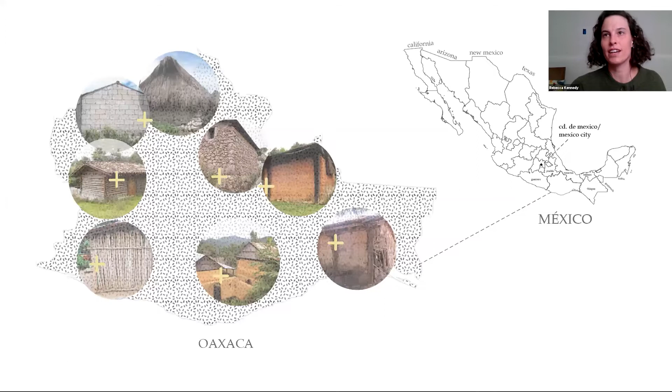So when I'm thinking about the ways that these techniques have impact on the broader land use patterns, these are, by the way, all techniques that I study in very rural areas. Urban areas have primarily shifted to fully concrete, but some of these examples are still extant in small towns. So one of the anecdotes that always comes to mind is the story of zacate, which is a type of grass that used to be used for thatching roofs. This photograph was taken in the town of Zacatepec.

The first part of that town's name is zacate, that grass, because all of the roofs in the town used to be made of zacate, and it used to grow in abundance in the public lands surrounding that town. And this photograph was taken, these two people kindly agreed to take me out to where the zacate fields used to be located and where people harvested the grass from.

And today there's only some scattered plants, very poor quality. They wouldn't be good enough for thatching with. And these people also, we knew generally where it was, but there's sort of a loss of knowledge of where the plant was even, where it's located, where those fields used to be.

So this shift in abundance of the plant and of local knowledge has to do with widespread adoption of concrete construction and corrugated metal roofing, which of course has been sort of marketed as this indestructible building material. But roofs like the one on the left that were thatched, as I mentioned, used to be literally the only roofing technique in the town.

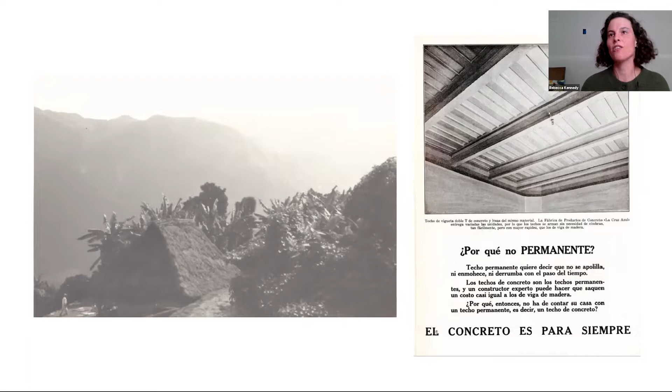And using that material went along with a certain set of practices of land stewardship, such as burning the zacate fields every year, and also just the act of cutting the grass to use for thatch. The cutting and the burning both stimulated regrowth of those zacate plants. So as building techniques have shifted to concrete, the plant itself has ceased to reproduce.

So I just find this story very indicative of trends that are happening in towns all over Oaxaca, all over Mexico, and all over the globe, where two interesting things. So the younger generation really has no knowledge of where those plants were located, how to harvest them, when they might be ready to harvest, let alone how to build a building out of them.

And secondly, even if they wanted to, the materials, I mean, mineral resources are a different story, but biological, if we're talking about plants, there isn't enough abundance to really build with. Two architects tried to build a house in Zacatepec 2 years ago with a zacate roof, and there literally wasn't enough quality grass in the whole town to thatch one roof with.

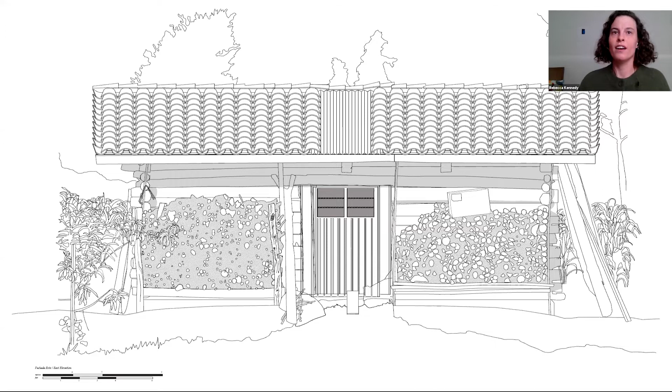So I'm going to take you guys through the full process of material harvest and refinement for log cabins, which are really prevalent in northwestern Oaxaca in a really heavily forested region where, aside from adobe, all of the building techniques are very reliant on pine products.

So when people are deciding what technique to build with and doing the calculus of what for us might be saving to build a house, saving money, the cost of a traditional home depended a lot on the distance that you had to travel to gather a material and the means of transport.

For instance, pine needles, which people also used for thatch in this area, are a relatively cheap material because you can carry them on your back. You can enlist your family over a period of days or months to help you harvest and carry it.

A material like logs is quite expensive because you need help processing the logs, which involves trade of labor with someone in your town, a friend or family member, which you have to pay back with help on future projects. All of these techniques were outside of a wage economy and based on cooperative systems of labor.

With logs, it also entails use of oxen to drag the logs because they're very heavy. To have oxen, you're automatically sort of wealthy because you can afford to have them, or if you're trading with someone else for use of their oxen, that's again increasing the cost. So these decisions involving the landscape were very integral to deciding which materials to use and what to build your house out of.

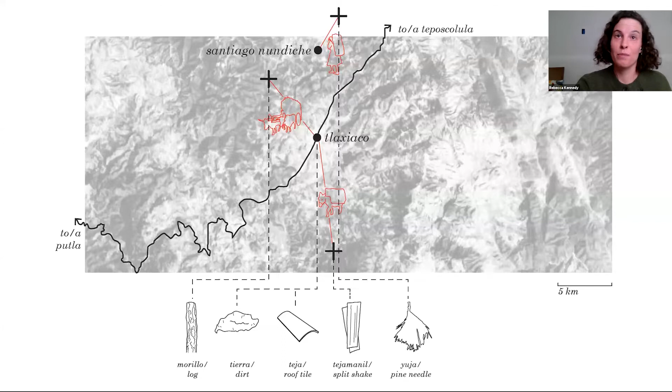So supposing someone decides to build with logs, you would go into the forest typically in pairs of two and work with a partner to cut down the tree and process it, peeling the bark off, working alongside someone else. You end up with an octagonal log, as symmetrical as possible, very measured about making all faces even so it will sit nicely in the wall once you're using it for construction.

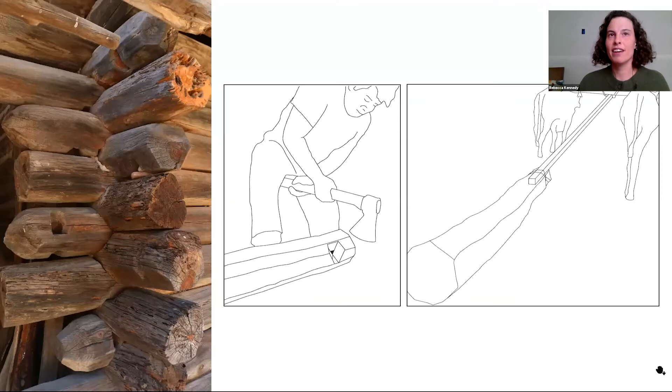Then they leave it to sit in the forest for a minimum of two weeks to dry out so it's lighter to carry. At that point, they cut notches or holes in the end of the log so oxen can pull it. This is where trade comes in handy, because you might enlist someone else and their oxen so you have two pairs carrying as much lumber as possible back, so the whole job gets done quickly.

On the left, a lot of houses still have holes left over from dragging the logs back to the building site from the forest.

Just really quickly, in the same region, split shakes were also very prominent roofing materials, using the exact same pine products. This entails a different set of knowledge that varies based on what finished product you're looking for. With split shakes, you need to cut the tree open, make a little incision to check the grain pattern, and make sure it's straight enough so it will split evenly into nice shakes.

These guys know which trees they've checked before, and which trees might be coming of age for kind of old growth lumber forests, like the back of their hand.

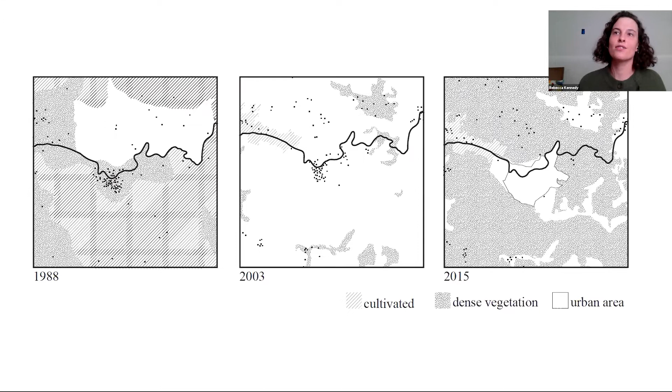As people use the landscape around their town less for agricultural cultivation and less for cultivation of construction materials, the town landscape is in some ways becoming more neglected, and as a result growing back, which of course has some ecological benefits potentially, but it's also interesting because it implies a lack of stewardship.

So these changes in the physical composition of the landscape also are related to our conceptions of the outdoors and nature, what we might call nature.

His parents, coming of age in the generation where the shift to the wage economy was happening—I'm generalizing here—have a more nostalgic view of nature. And then the youngest generation today just has a much more urban conception of nature as a place for recreation.

So bringing this back to construction materials, Oaxaca and many parts of the globe are witnessing this dramatic transition in construction technology that's almost completely taken place. It's hard to know at times whether importing materials and potentially having regrowth of forests is a good thing, or whether it's better to have a really innate understanding of resources and how they're being used. These are complicated decisions, but it's important to analyze the ways we often think of materials and construction technique as a direct relationship.

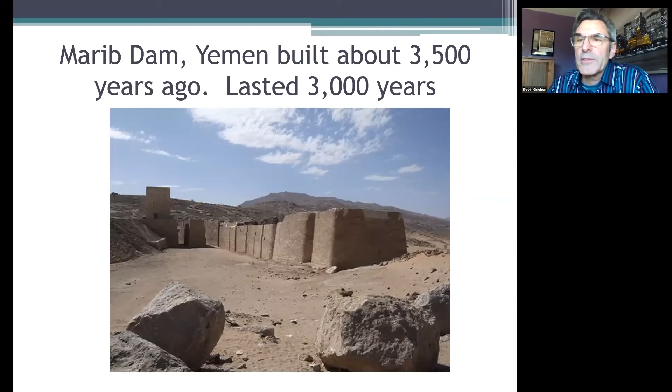Also related to this, in 1586 Simon Stevin, and Pascal in 1663, solved the hydrostatic paradox demonstrated by Pascal with the exploding barrel experiment. If you have not Googled this, there's a great YouTube video of the exploding barrel experiment. That is, the pressure at a certain level in a fluid is proportional to the vertical distance to the surface, not the volume above it.

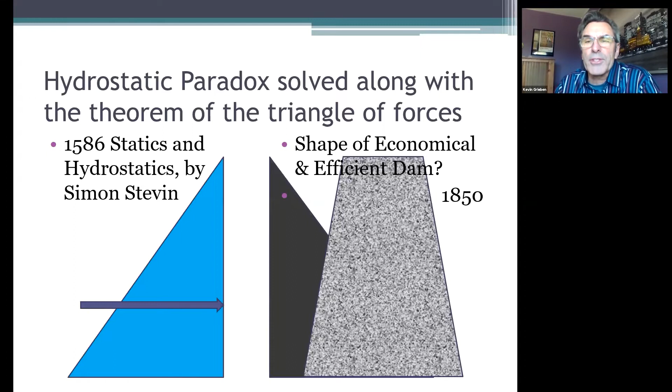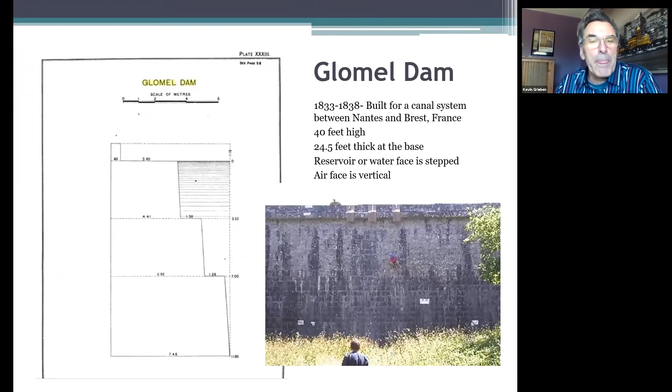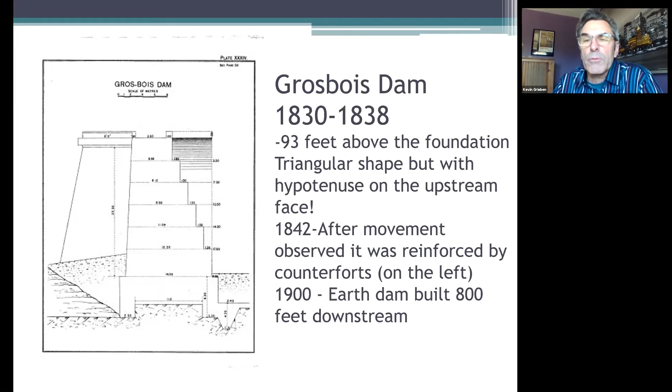Another similar dam is the Grosbois Dam in eastern France, and it was initially built like the Glomel Dam with a vertical downstream face. It is mentioned in the ASCE book on instrumentation for dams that the crest was surveyed to monitor its displacement. This monitoring during successive infilling and emptying found the dam to be deforming elastically. With movement mentioned beyond what was expected, counterforts or braces were constructed against the downstream face.

A gravity dam, which we hear a lot about, is constructed of concrete or masonry and is designed to hold water by using the weight of the material to resist the horizontal force of water. The previous two examples were poor examples of a gravity dam. A design for a gravity dam is finally resolved into an economical design in about the mid-1800s.

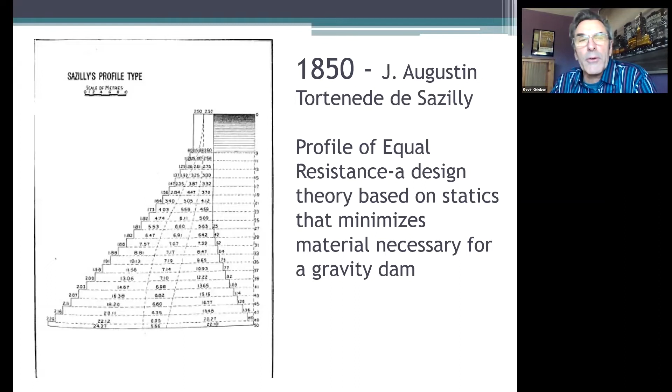An early design is by the Frenchman Sazilly. He believes that an economical design for dams would eliminate tension in these masonry walls. To me, it's interesting that they were thought of as masonry walls and not really as a dam. But no uplift pressure was acting on the base of the dam, and notice that with his assumptions, the base is basically, or maybe slightly less than, the height of the dam.

So 8 years after he comes up with this theory, a very risky engineer, I would think, implements that theory and designs and constructs the Furens Dam in France. And so he builds the highest dam in the world at the time with this new theory. And that just seems a little strange to me as a way to test out a new theory.

The 180-foot high dam was completed in 1866 using 52,000 cubic yards of masonry. As the method was new, the dam was slightly arched across the gorge for additional strength. And again, in Wegmann's first edition in 1888, it is said to be the first masonry dam, quote, built according to scientific principles. And again, the dam is still in use today for flood control.

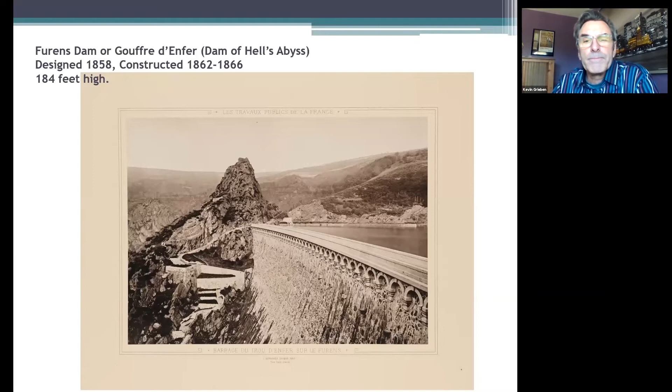20 years after Sazilly's profile of equal resistance, the famous Scot William Rankine develops 3 rules to ensure the stability of dams. The second rule, again, deals with tension, and he says it should be eliminated in dams by keeping the resultant in the middle third of the base, or the kern. And again, uplift pressure is missing, but directly impacts his rule number 3.

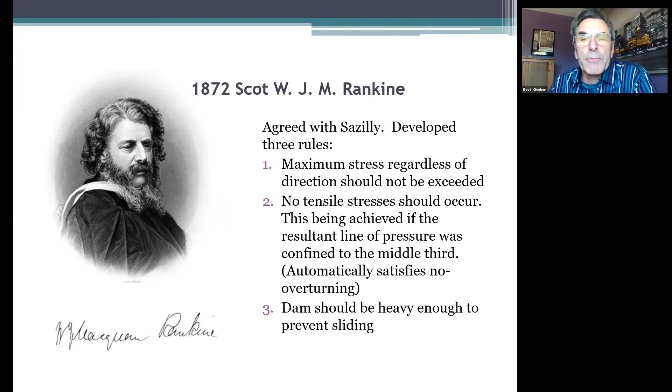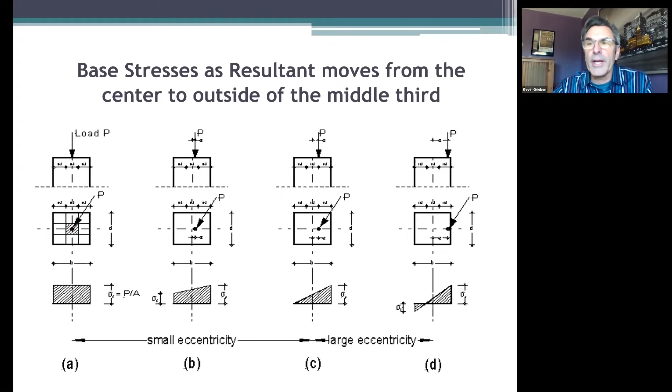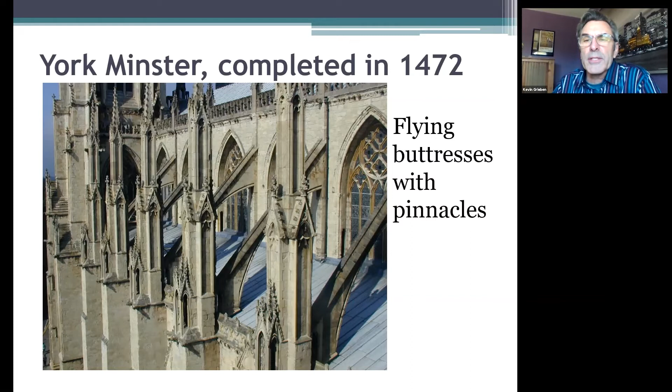Because to me, it shows that these masons in 1472 knew that these pinnacles reduced or eliminated the outward thrust coming from the flying buttresses and reduced the tension in the piers in these cathedrals. As we will see, this realization to reduce or eliminate tension is not codified in dams for another 400 years.

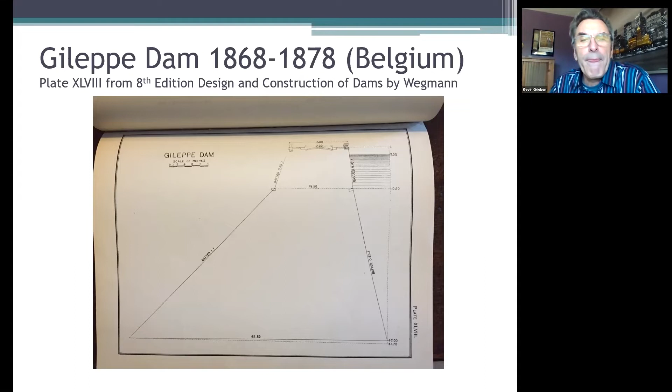Upon first filling and for about 4 years, the leakage rate through the masonry was about 220 gallons per minute, and some thought that leakage through the masonry was good. Also, what was very interesting is this masonry dam took 6 years to build with about 325,000 cubic yards of masonry. The work per man amounted to about 3 cubic yards a day, and in today's construction, I don't know if that would cut it.

Similar to the pinnacles on top of the flying buttresses, were the engineers thinking to include this 300-ton, 44-foot tall lion sculpture in the stability and stresses in the dam? I don't know. And if you think about it, this 300-ton statue is very similar to a post-tension anchor that we install through dams to increase their stability today.

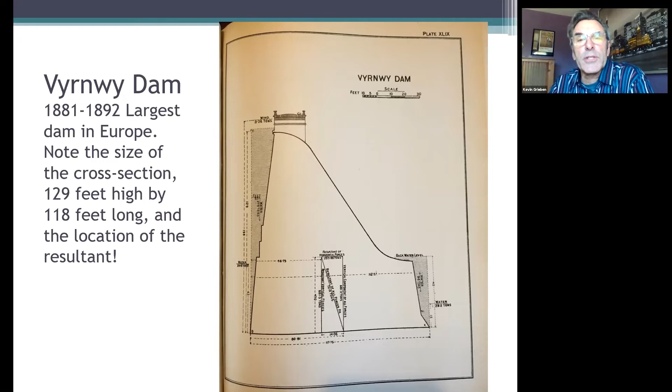So now we move to Great Britain, and there is a Welsh dam, Vyrnwy. This dam is of Cyclopean rubble, and it's very similar to the massive Gileppe Dam 15 years earlier, and is the first large storage reservoir to supply water to Liverpool. Its base is about 90% of the height. And notice the static computation for locating the resultant, and that it is located within the middle third.

However, this dam has a new twist. It has drains. And I've read before that the drains were installed at the insistence of the contractor that was involved with the design. So to me, it's an interesting coupling of the contractor for construction and the designer.

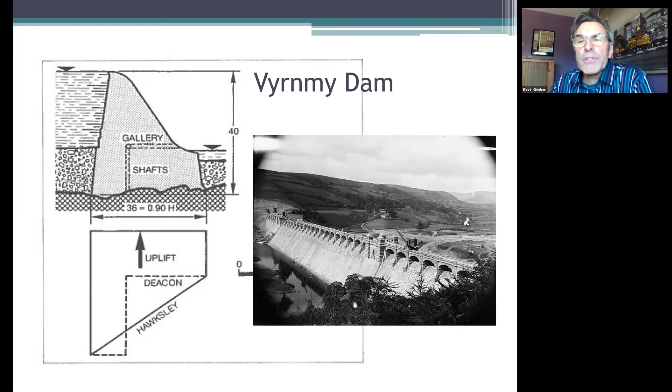This shows the resulting cross-section with the design assumptions and drainage tunnel due to concerns of leakage at the base and through the masonry. The uplift shown by the solid line in the diagram below the dam's cross-section was full headwater to tailwater, assumed by the engineer Hawksley. The dashed line shows the assumed uplift by Deacon, who I believe was also a designer, but also a contractor, as the line of drains drops it to the tailwater. These uplift assumptions are close to what is typically assumed for current dam safety assessments.

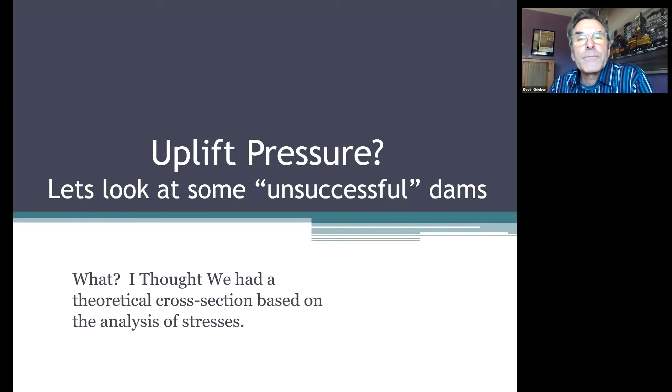So we have seen that uplift pressure was sometimes considered in the design of dams, but was not included in the design standard, the profile of equal resistance. So we remember that cross-section of the Vyrnwy Dam with its base 90% of the height. The Bouzey Dam is less massive with a base of about 60% of its height. And the Bouzey Dam failed in 1895, killing 85 people.

And interestingly enough, a forensic investigation followed. It concluded the need for a solid foundation, no tensile stresses, and to include uplift's role in the design.

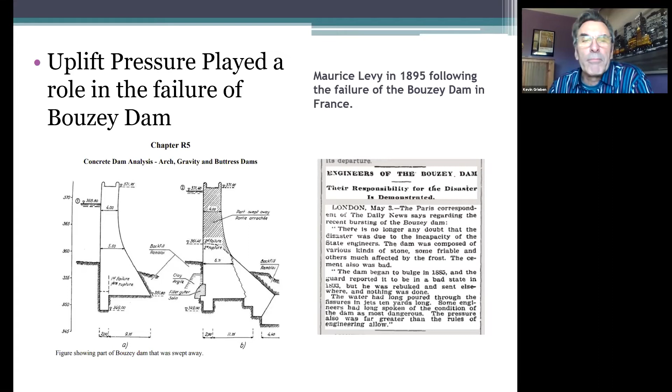So 20 years later, Wegmann's 5th edition comments on the uplift force by stating, quote, some attention should be paid to this force in the case of very seamy foundations, but in most cases, this force will be exerted only on a very small area of the base of the dam. Notice it just says a very small base.

In his 8th edition in 1927, the consideration of full uplift leads to, quote, the folly of taking such extreme assumptions, close quote, requiring a base as long as a dam's height, which is very similar to what the Belgian engineers assumed. But he calls that a folly.

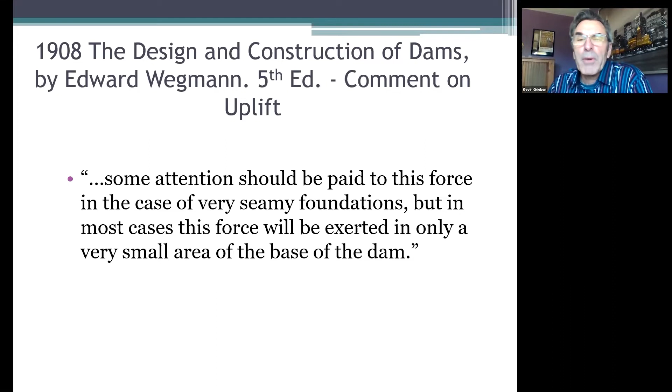So we go to the St. Francis Dam just a year or two later after he published his book, which was a concrete gravity dam, a new material. It was completed in '26 to a height of 185 feet. At 11:57 on March 12th, 1928, the dam catastrophically failed, and the resulting flood killed more than 431 people. Uplift pressure played a role in the failure, along with several other design and foundation issues.

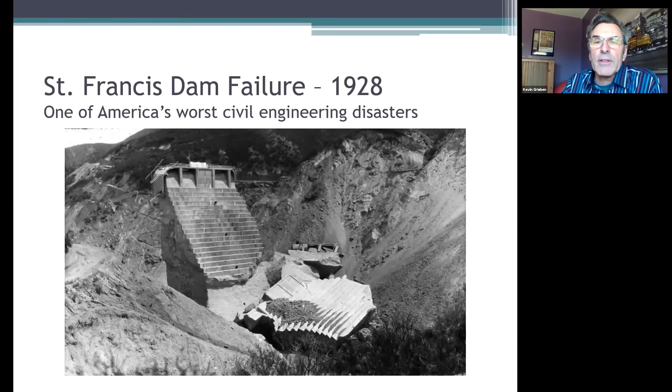And the disaster marked the end of the designer Mulholland's career, who started as a ditch tender for the Los Angeles Water District. And I think this picture is interesting: the main section of the St. Francis Dam was constructed with 10 uplift wells set in 2 rows. And this portion of the dam did not fail, only the sloping abutments, which did not have relief wells or drain wells. One would think that on the basis of this photo alone, uplift and drains being critical for the stability of dams would be assumed.

So now we go to the granddaddy of them all, Hoover Dam, which we always assumed had no problems at all. But Hoover Dam, of all dams, also had uplift issues. A grout curtain consisting of just a single line, which we know is substandard today, and only about 125 feet deep, was installed as they were preparing the foundation. And this depth is only about 20% of the dam's height. Interesting also, 4 holes had to be abandoned on the Nevada side due to excessive grout takes. And this is a big red flag when you're talking about foundations for dams.

When the reservoir was filling in June '37, excessive seepage flow overwhelmed the lower galleries and excessive uplift pressures were measured against the dam. So a post-construction grouting program was carried out from '38 to '47, and they extended the grout curtain to more than 300 feet below the dam foundation. And this post-grouting program cost almost $4 million, and the original cost of the entire dam was $50 million. So this post-grouting error, or the poor assumption, cost about 10% of the original cost of the dam.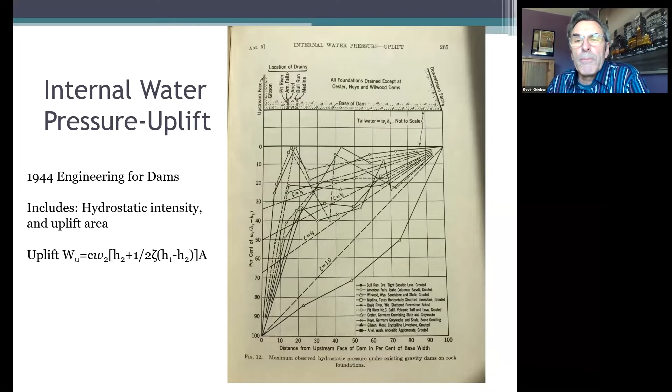This debate about this potentially large force acting on dams continued for about 75 years. After numerous dam failures, it was concluded that the uplift force plays an essential role in their demise. To me, it is interesting that the initial design assumption is that uplift is small or only acts over a very limited area. Today's design standard is that headwater to tailwater uplift pressure is assumed unless an extensive grout curtain and drainage system is included.

And we end at the tallest dam in the United States. The spillway chute failed along with the foundation rock while water was being released down the spillway chute. This failure is related to uplift pressure. In this case, it was hydrodynamic pressure flowing over the concrete slabs.

In conclusion, I'm amazed to find out that it took about 75 years, or about 2 generations of engineers, designers, and construction, along with dam failures, to reach an understanding of uplift pressure for the design and assessment of dams. With a historical understanding of how uplift pressure was treated, dams that were designed and constructed before about 1950 will likely assume reduced uplift pressure.

This line of history is not what I thought engineers typically follow, that we usually start with a conservative assumption and refine our design and analysis as we learn more. What path are we following as designers and engineers these days? Are we following, quote, successful designs, or are we learning from and anticipating failure, whether actually experienced or hypothetically imagined?

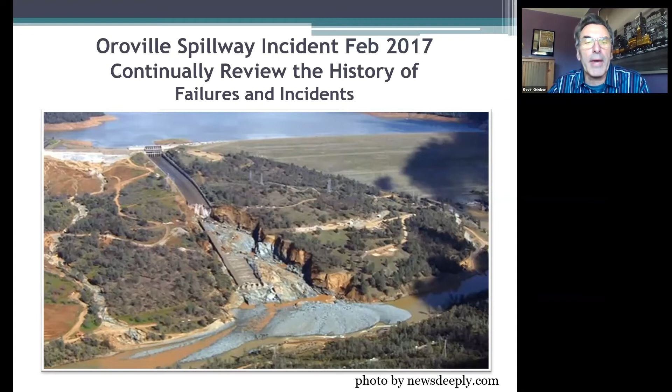Thank you, Kevin. I'm pleased to pipe in that all those Maryland civil engineering students need to solve for W sub U. There'll be a test on that, just so you know.

Clifton, any questions? There's some, yes. I'll just take the first one from the top. It says, when did the engineers develop an accurate equation for uplift pressure? Well, I would say it kind of goes dam by dam and foundation by foundation. You basically have to assume the conservative headwater to tailwater, and then you literally have to measure it. You make a design assumption, then you construct it, and then you measure it to see how close you were.

That is very difficult. To me, it's interesting, that equation that was presented there that Peter pointed out. There's a lot of variables in there that you basically have to make assumptions or engineering judgment on. And we just don't really have a good handle on that still to this day. And it's so variable with the foundations.

Hello. So I'm very excited to talk from the other side, the other continent. I'm talking from Rome, Italy. I'm an architectural historian and a practicing architect. I have been working on archaeology since I was a student, starting with the Colosseum, and then expanded my experiences in the Mediterranean. So today, I would like to offer this presentation on brick vaulting. This is a study I have been doing the past 20 years.

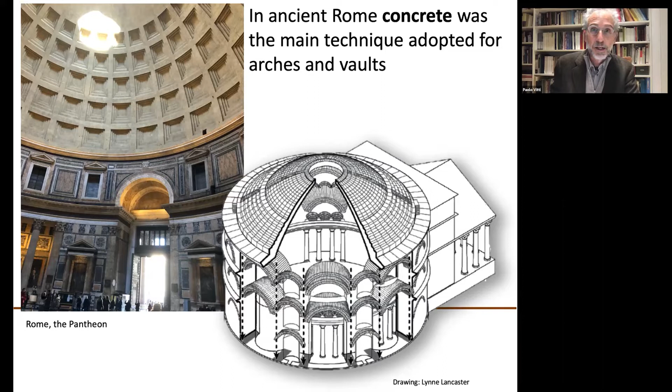I think that you know the Pantheon in Rome. It's an extraordinary building that was built in Roman times. And as you know, the vault is made out of concrete and shows the potential of a building technique that was very successful for the Romans, but in some way was not adopted in later construction. If you take, for instance, the dome of the Duomo in Florence, it is a brick construction. So the point is, brick construction became, for vaulting and arches, one of the most successful ways to address monumental domes. And it's interesting to understand where this system of construction originates from.

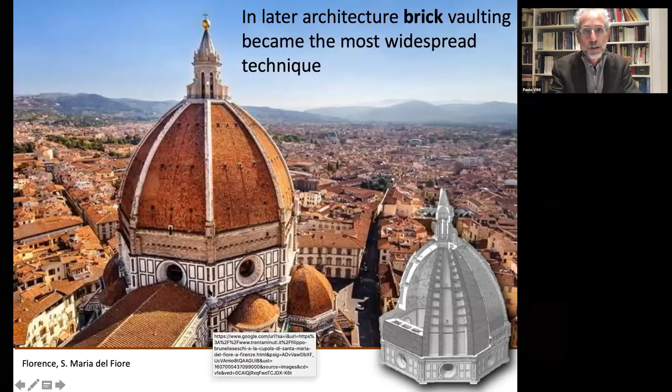To do that, we have to go to earlier periods. We have examples, of course, of brick vaulting in the Middle East, much earlier than Greek and Roman times. But in the Mediterranean, we start to find the use of brick construction, brick vaulting and brick arches in the Hellenistic time, that is to say, between the 4th and the 1st century BCE.

One of the possibilities is that this kind of construction was ideal for building furnaces, that is to say, places where ceramics were fired. And from that, special bricks resistant to fire were started, and we have many examples, as the one you see here, which is in Sicily, of vaulted construction made with bricks. So it's very interesting to understand where and how this building technique for vaulting started to be adopted in the Mediterranean.

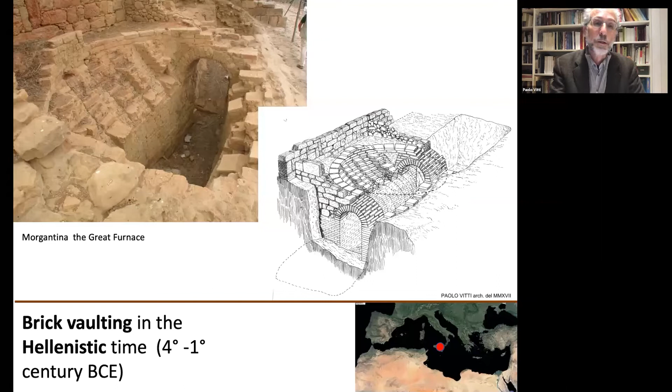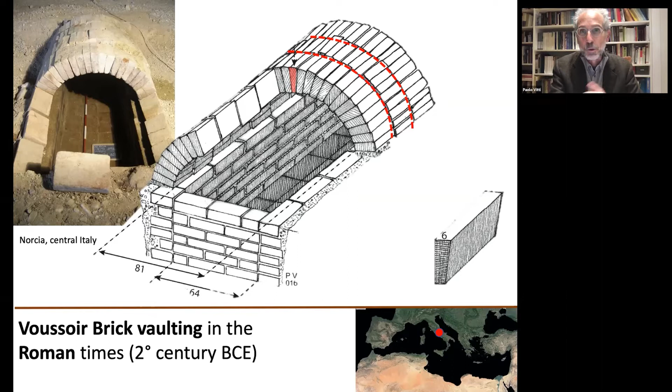And as you know, from the Mediterranean, it then expanded to the whole of Europe and became, and still is, one of the systems that is an alternative to the use of concrete in construction for vaults. This is an example in central Italy. This shows how the ingenuity of builders started to use brick vaulting without mortar, with these voussoir bricks, that is to say wedge-shaped bricks, in order to give the shape to the vault.

Actually, the system adopted for the construction of vaults made use, particularly starting with the Roman period, of mortar as a bonding agent. So the typical thing that you can see is this kind of vault that we can find in Greece. It is parallel to the use of vaults in concrete in Rome, but is completely different in the way it is achieved.

You have the centering, that is to say, the element that supports the vault during construction. Then the vault is built. At the moment you put the key brick, the forces start to be diverted to the abutments. And then at this point, you can remove the centering and then build above this, typically in a Roman way, a massive vault made out of mortar rubble. So the form looks like a concrete vault, like the one you could find in Rome, but actually is built with bricks.

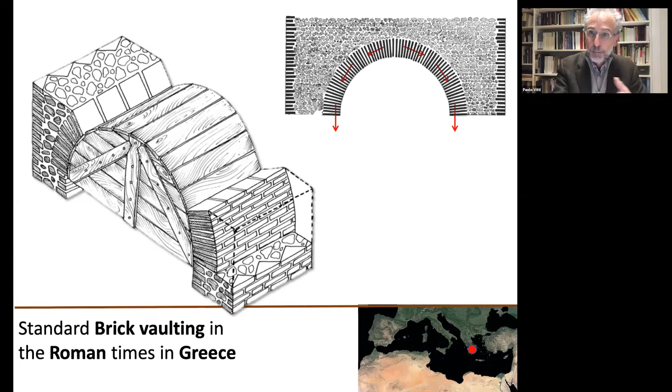The reason for that stands in the fact that the quality of mortar, which is fundamental for a concrete vault, was not possible in other contexts different from Rome and other places around Rome. So in Greece, they developed this kind of building technique, which gradually became very successful, to the point that we find in Greece these very exciting buildings, of course, in ruined condition. The positive thing is that we can study the way they are built, because they are not plastered, and the masonry is visible.

Another system that was developed in Greece was imported from the Middle East. These are the so-called pitched or vertical brick vaulting. This is made in a completely different way. The bricks are not placed radially, but are placed as arches, thin arches, as thin as the bricks, that are placed one against the other. The positive thing of this kind of brick vaulting is that you don't need a centering. So you don't need a support, because the first arch is built against the end wall.

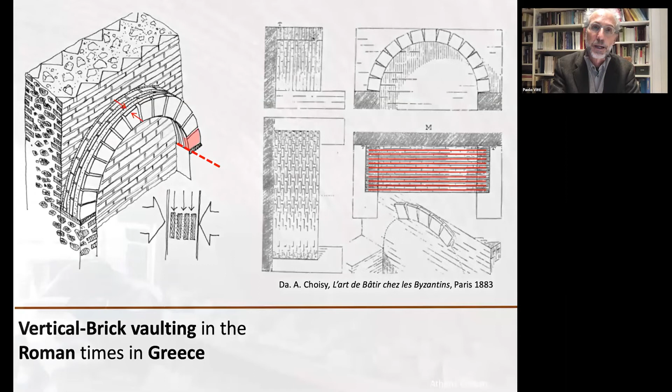And so here you have an example of a cistern of the Byzantine period in Athens. This building technique is still adopted in Mesopotamia and Iran. This is a picture that shows how builders can create a vault without using centering. And nowadays we have many exciting examples like this that are documented. There are many builders in Mexico that are doing that. So I connect, of course, to the Mexico lecture, because in Mexico, in some areas, there are masons that are still adopting traditional construction.

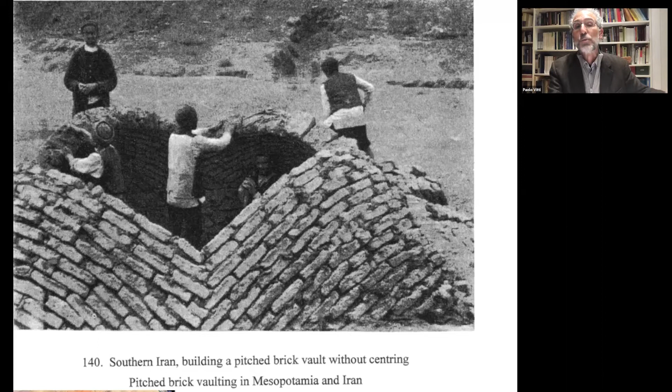And so it is very important to go back and learn about these building techniques, because they have very strong potential today, especially with the challenges we have, for instance, with climate change, and we have to find building techniques that are more resilient. And so for this reason, we have to go back to the experience gained in the past and in the traditions.

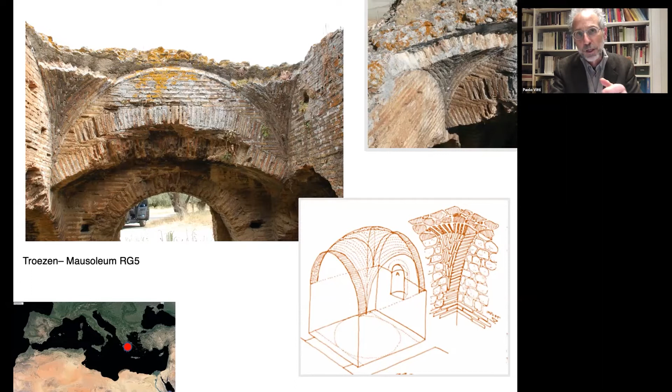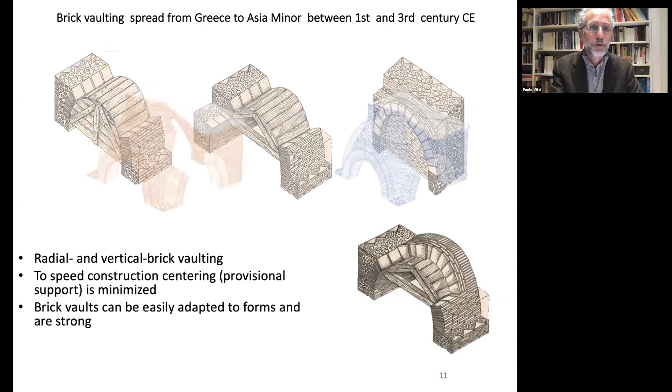This is the same mausoleum we saw earlier. And here we see the use of this kind of pitched brick vaulting, which is adopted for the upper part of the dome. So in Greece, they developed these two ways of building, radial or vertical brick vaulting. Actually, the masons were concerned about minimizing centering, because it's a matter of making the construction quicker, more economical. And for this reason, brick vaulting became particularly successful in the Roman Empire, except in Rome.

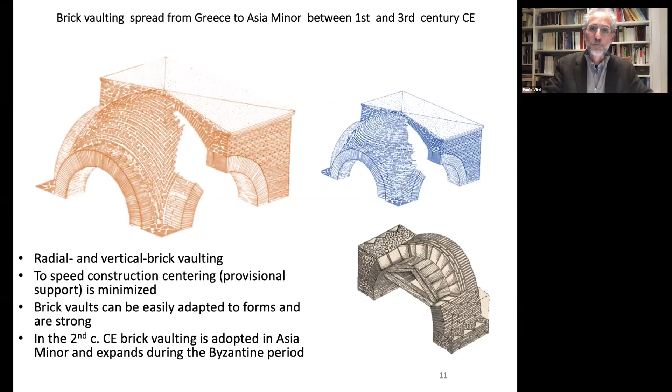But from Greece, it went to Asia Minor, and from Asia Minor, it was adopted in Byzantine architecture. And the Byzantines exported that to Italy and Spain. And from that moment, we can more or less follow the expansion of brick construction all through Europe. So brick vaulting became incredibly successful in Europe.

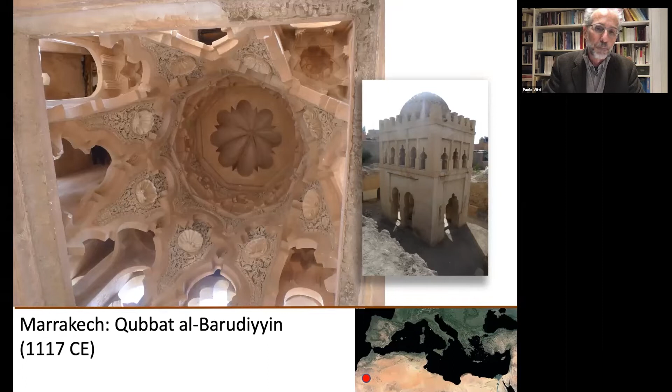Now, the last step of this presentation will be something different. What comes after? What can you do? You can do vertical brick vaulting without centering. You can do radial brick vaulting with centering. But then, at a certain point, it happened in Marrakesh. At least I am proposing today this building, which is absolutely outstanding, placed in Marrakesh, as the first building using a new kind of vaulting technique, which is the so-called tile vault.

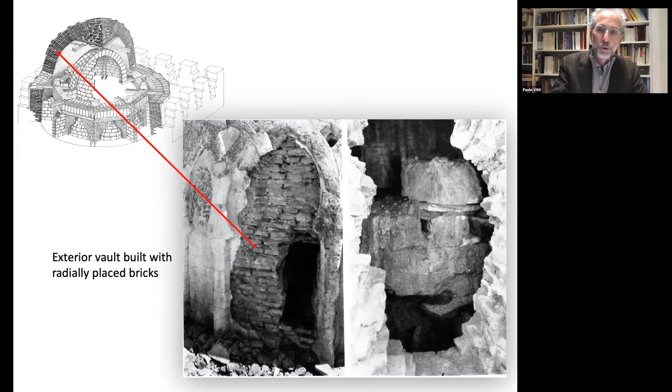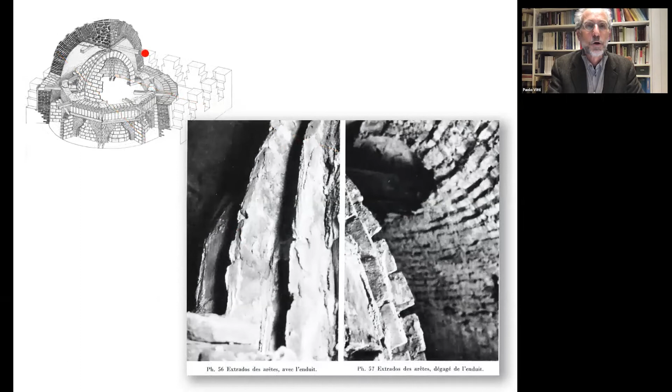Here you have some pictures showing that this building has an exterior dome, which is made traditionally with radial brick vaulting. And then you have inside, protected by the exterior vault, a very particular vault. You see here, this vault is placed on these timber brackets. There is a stone which is placed above to stabilize the bracket. And then you have these ribs that are built on the bracket. This is absolutely unique, outstanding.

And the understanding of this kind of vault is very difficult if we don't consider that the experience comes from other regions, as we will see. The point is that between the ribs, you have these bricks that create a tile vault, that is to say, a very thin vault, which is as thick as the brick.

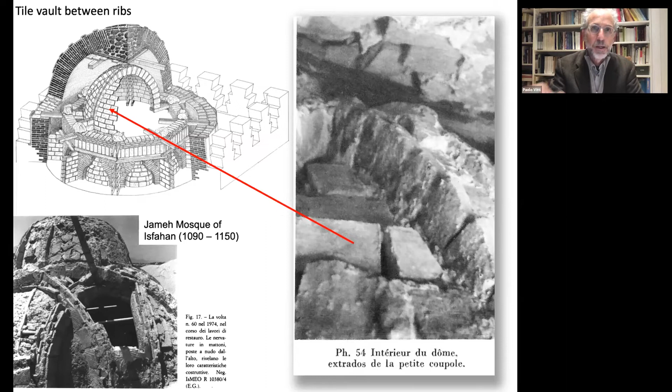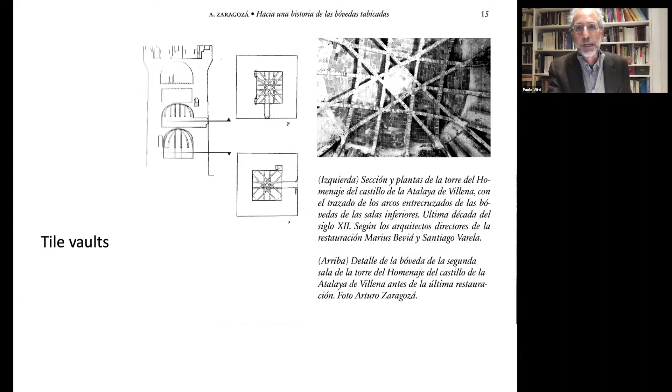The origin of that comes from Persia. There are examples of this, and the very difference from the other vaults we have examined is in the use of a different bonding agent. These tile vaults, and here you have an example, the first example documented of tile vault in southern Spain, some 80 years after Marrakesh. They use gypsum as a bonding agent.

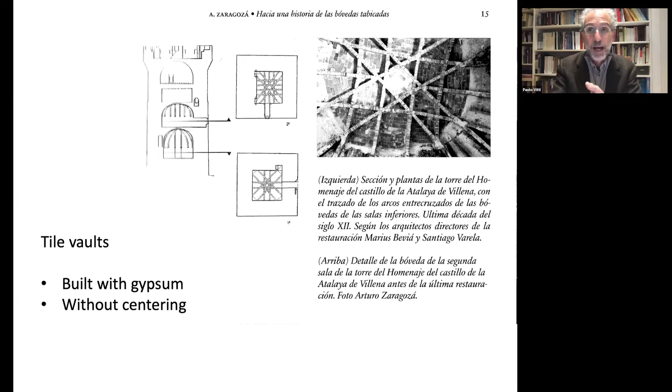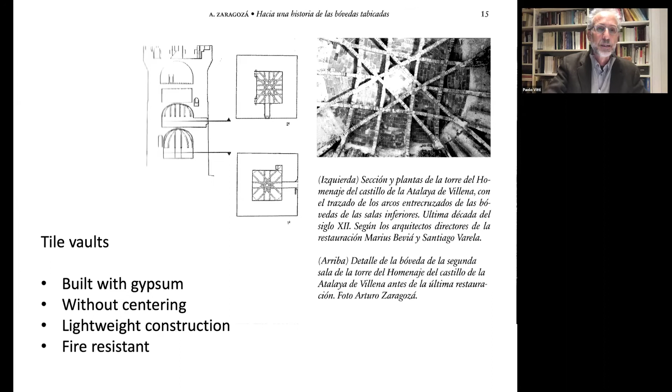So gypsum sets very quickly, so it makes it possible to stick very rapidly the bricks one against the other. And it doesn't use centering, so it's ideal. And it's an incredibly lightweight construction. So it has all the ingredients to become a very successful brick vaulting. And then it is fire resistant.

Thank you. Paolo, I have a question. I haven't received any questions from the audience yet. In terms of the advantages and disadvantages of radial versus vertical, once the advantages of vertical vaults were realized, not using centering, what were some reasons to continue to utilize radial vaulting? Is there a performance difference between the two in the long run that is recognized, or is it just maybe because, I'm not sure, looking for maybe the motives to use one or the other?